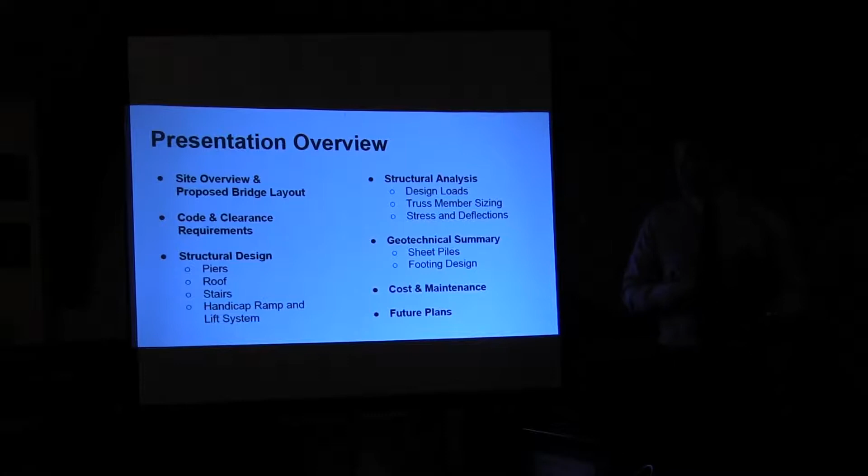All right, so just to cover some of the major topics we'll talk about today: we'll start with a general site overview of the proposed bridge layout, down the street where Diana Street, Friendship Street, and Broadway meet. Then we'll discuss some of the design constraints we face with code and clearance requirements. In terms of engineering design, we'll talk about the bridge piers, the various roof designs, and handicap accessibility systems we went through. We'll move on to structural analysis in terms of design loads, stresses, and member sizing, then finish with a geotechnical summary, touch on costs and maintenance, and finish with future plans.

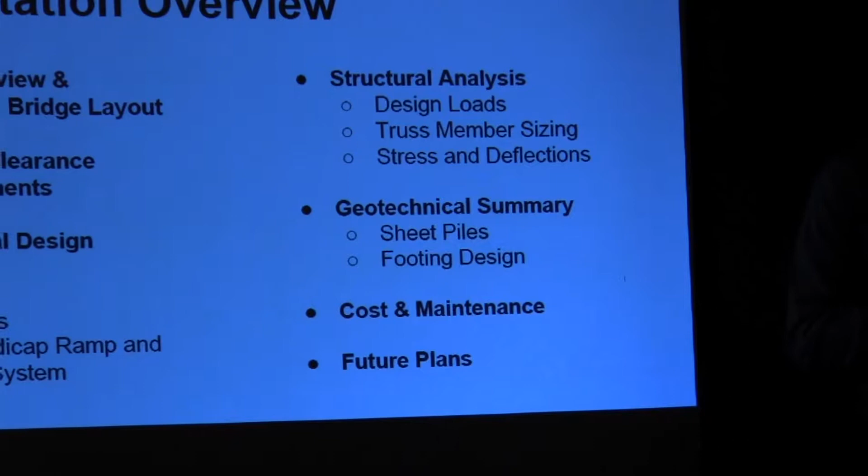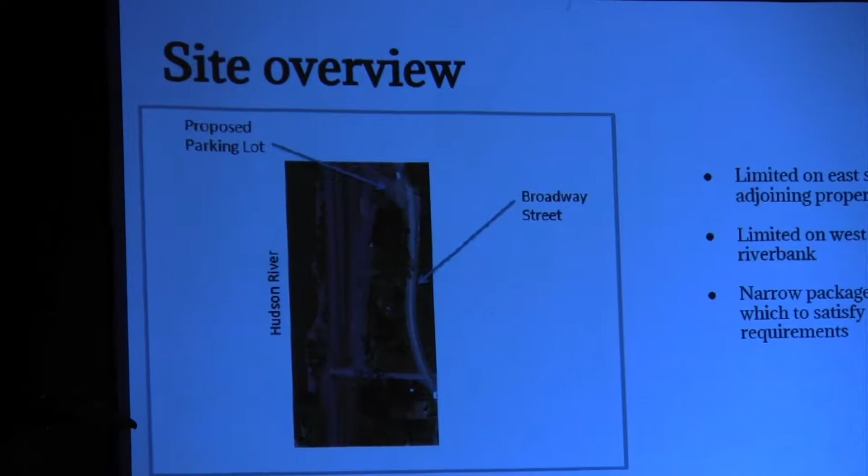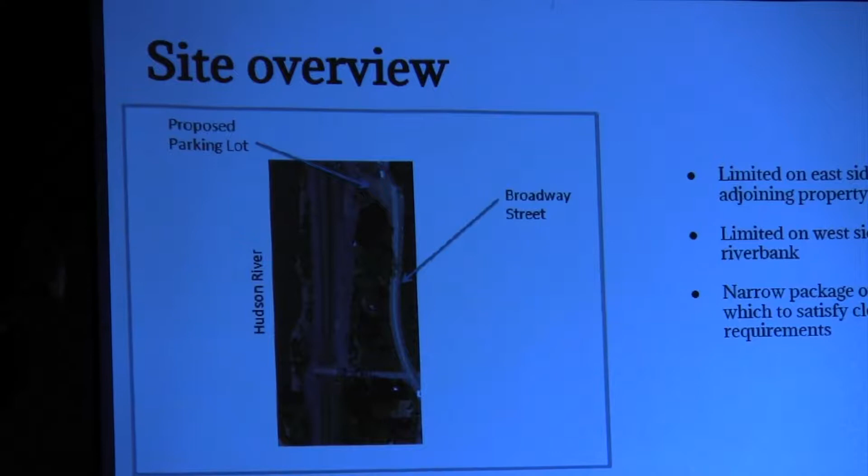For those of you that aren't familiar with the site, this is taken from Google Maps. We're thinking of positioning the bridge just south of Diana Street here. As you can see, the site is highly constrained by the Hudson River on the west side and the existing property lines on the east side. With Broadway Street running parallel, there's this empty lot, so we're thinking that could be a proposed parking lot further on in the project.

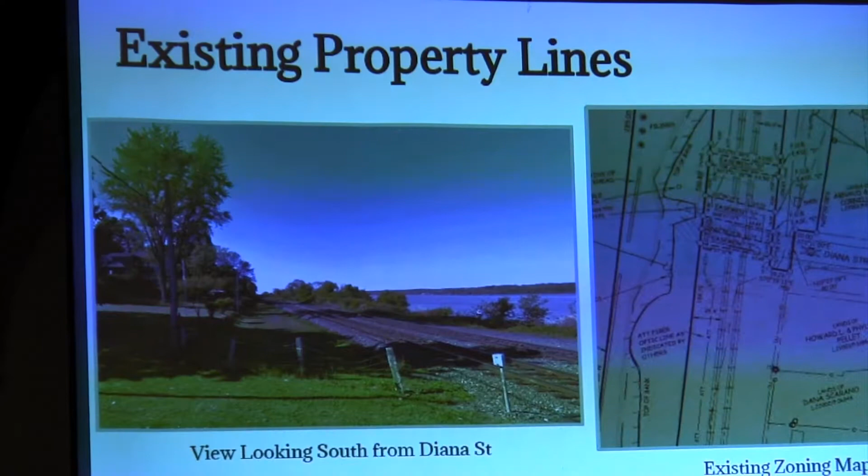This is just showing the existing property lines and how close we are to them with the railroad tracks. There is a law saying we could only be so far from the property lines, and that was taken into consideration in placing the bridge. On the right is an existing zoning map which shows who owns those properties and which ones the town owns.

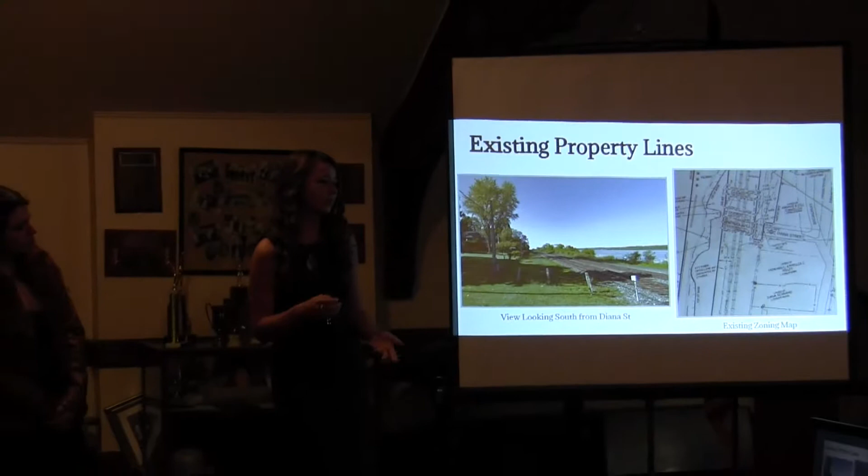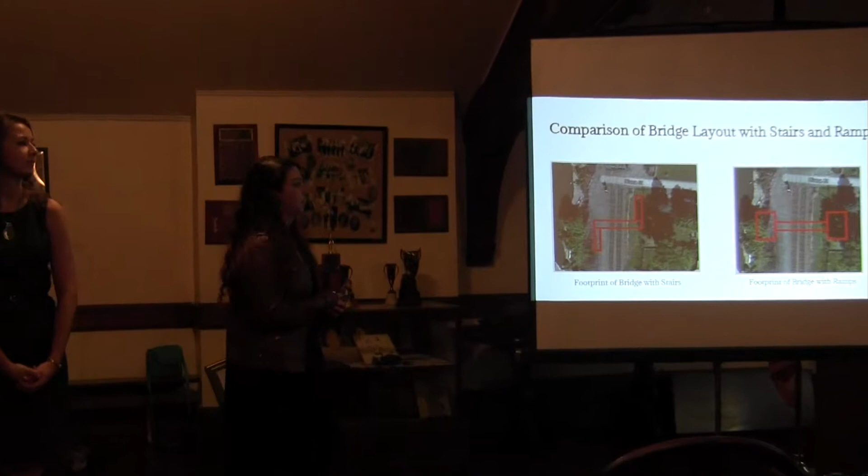In this particular slide, you can see our 2 original designs for the bridge. Our first thought was to create a handicap ramp to comply with ADA requirements. But as you can see on the right-hand side, that's the footprint of the bridge with ramps, and it's massive, clunky, and ugly. Each one of those ramps would wind up being about 300 feet long on either side.

So we decided instead, after talking with Joel, who gave us the wonderful idea of the handicap lift, to start exploring putting a handicap lift up along the flight of stairs on the other side, as you can see on the left hand, which is just the footprint of the bridge with a staircase instead.

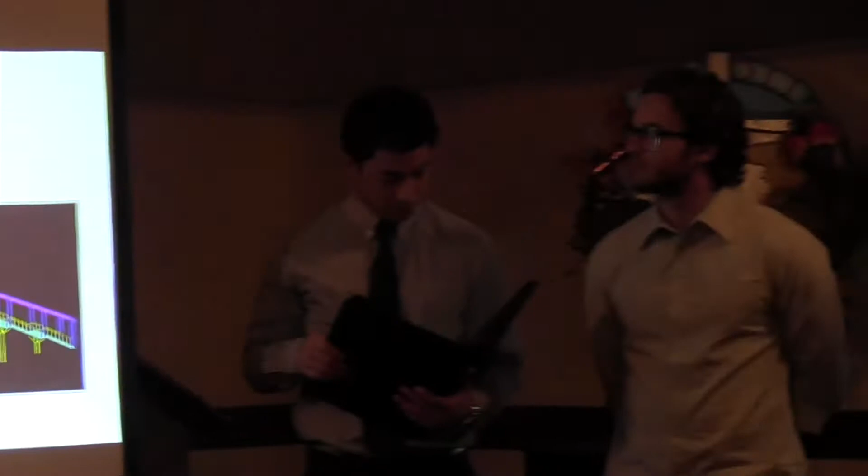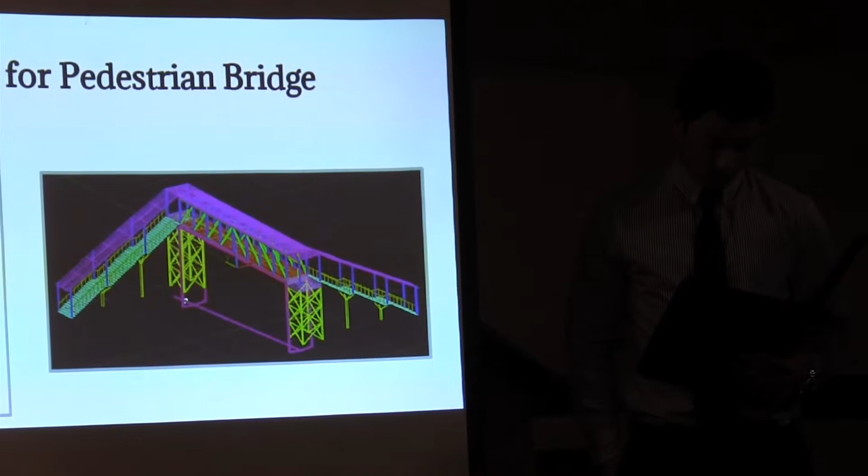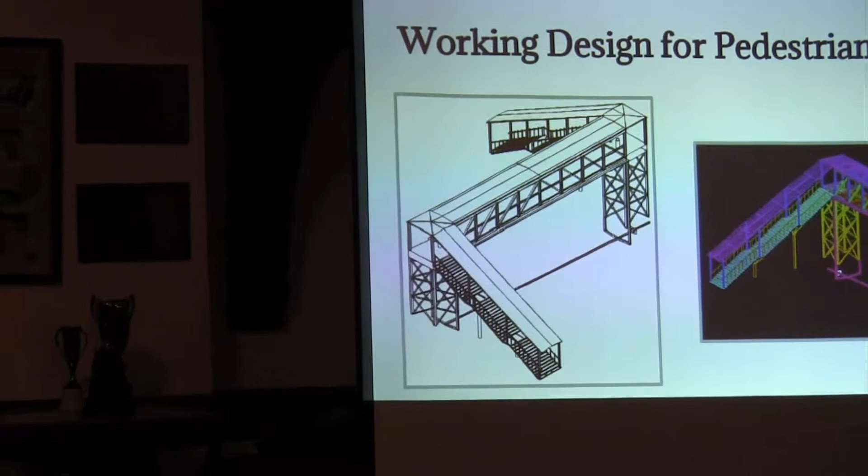So like I said before, I was the drafter, so we designed all our members from AutoCAD, took a bunch of the feedback from the last time we were in town, and this is the current working design. There's a fully covered bridge and fully covered staircase. The handicap lift that we'll get into later is attached to the inside of the staircase. The staircase is about 10.5 feet wide, each platform is about 10.5 feet wide as a square, and the bridge has a clear width on the inside of about 8 feet. The entire thing is 25 feet above the railway, and we'll get into that later.

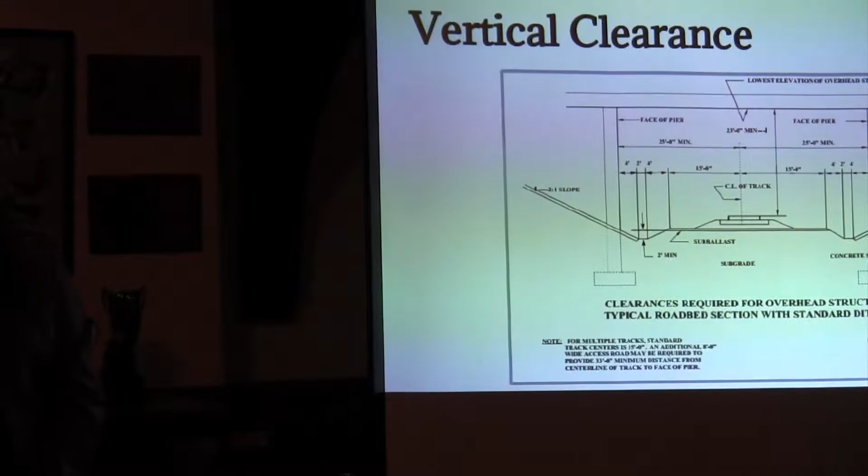One of the major requirements we had to contend with was the vertical clearance requirements. In order to have a bridge over a railway, the minimum clearance requirement is 23 feet, which increases for pedestrian bridges. So the max clearance, I think, for the bridge was 25 feet from the top of the tracks to the bottom of the bridge.

In addition, we had to deal with horizontal clearances, so the slope in the area might require some cut, meaning we'll have to remove soil from that particular area, and on the east bank, fill, meaning we'll take that cut soil and fill it in to smooth out the slope on the west side of the bank. More geological data is really needed for that, though. We don't have the resources for the soil surveys.

The bridge materials we're mainly using are steel and timber. Steel for its structural capacity, and timber because it's just way more aesthetically pleasing. We wanted to make sure that we were presenting to you guys a bridge that wasn't an eyesore on the community.

So then we looked at the individual components of that truss, which would be an arch and a Pratt truss. In the end, an arch would have been more difficult to construct to get that curvature right, and it would also have taken up more of the view shed. So our design is a Pratt truss, which is efficient to design, efficient to build, and stays with the aesthetic of the old railroad bridges.

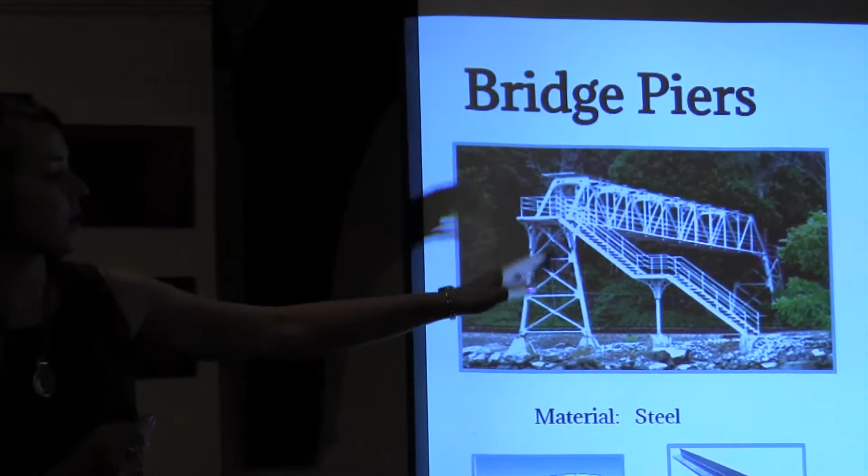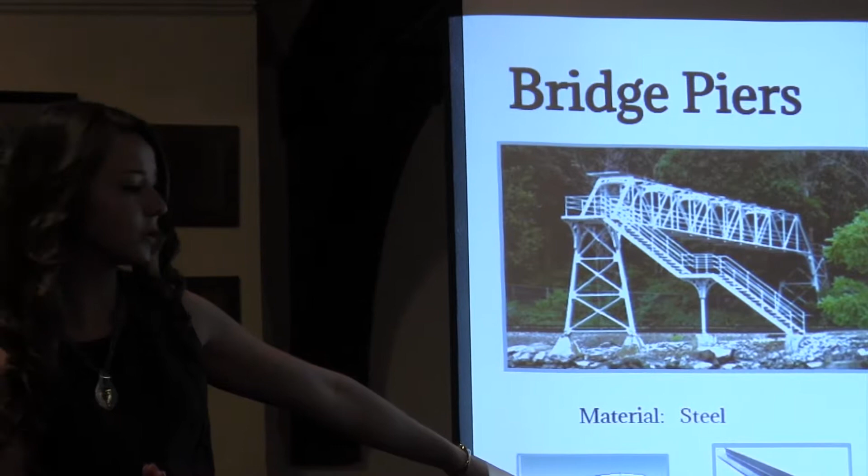The bridge piers, after consulting with the village of Tivoli at our last meeting, we had gone with a steel tower design. This is an example in this picture. The photos on the right are structural analysis of it, but it's a 3D steel tower with cross bracing. It's comprised of two sections, an HSS member, which is this hollow steel tube, and then angles for the cross bracing, and this is all made out of steel. The piers were analyzed in a computer analysis program and checked for all the loading, and then the member sizes were optimized accordingly.

For the alternatives, we had looked at concrete piers and also timber piers. We liked timber because it would go with the aesthetic of the bridge. However, in order to get the capacity we would need, the timber piers would be massive. So having steel piers allowed us to have a smaller footprint and a smaller column thickness. Concrete is very good for taking compression, so we could take a lot of load with that, however they're not as aesthetically pleasing. So one of our earlier designs was with a concrete column, but when we consulted with the village, we realized that the steel tower piers were more pleasing to everyone.

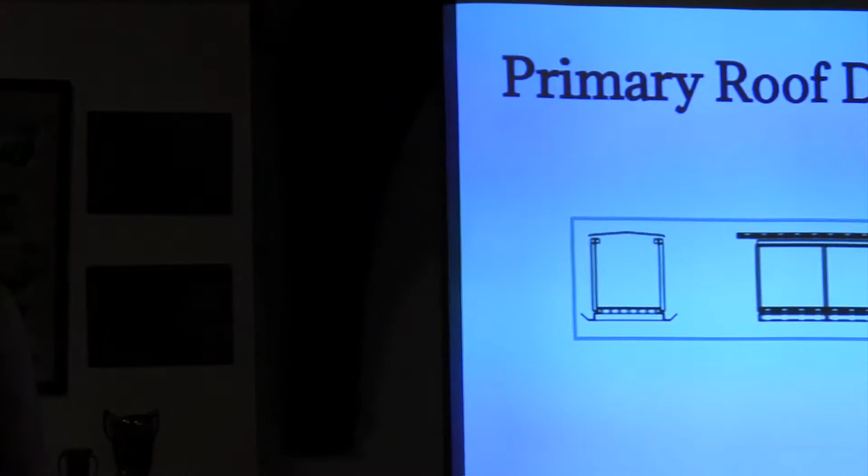So for the time being, this is the primary roof design. There are a few alternatives that will follow, but this is the cleanest design we found. It's all orthogonal with the bridge, it's neat, and it takes up less of the view shed. There are a few code requirements that say we have to drain water away from the train track by law, and certain code requirements that say how much an angle has to occur on the roof or the deck, and how much water needs to be flowing away from the railway specifically.

As you can see on this slide, there's a lot of play with it. I drew up a few options in AutoCAD to show the free play available, should the town go further with the project, as long as the engineers on record follow the requirements, because we can't be the engineers of record since we aren't licensed.

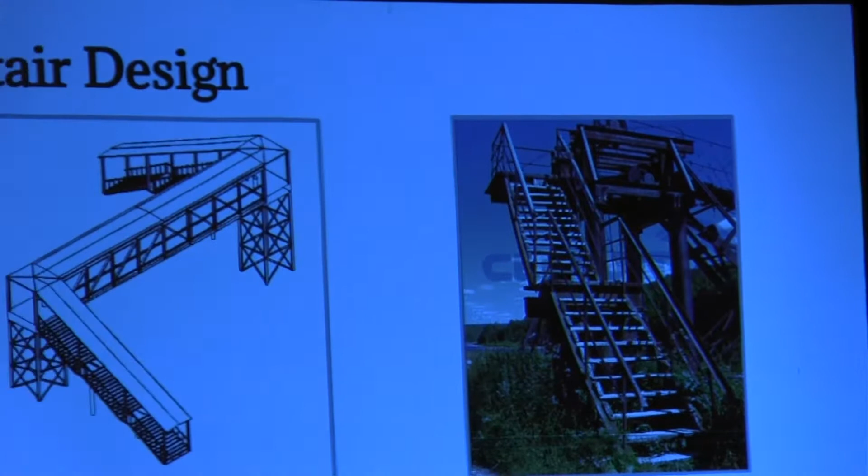Then there's the stair design, which also has certain code requirements. You have to have landings of a certain size every so often. Last time we were here, we decided to go for a covered stairway to help keep water, snow, and ice off the stairs. We also made the staircase wide so we could put the handicap lift and ramp on the inside, which we'll get into soon.

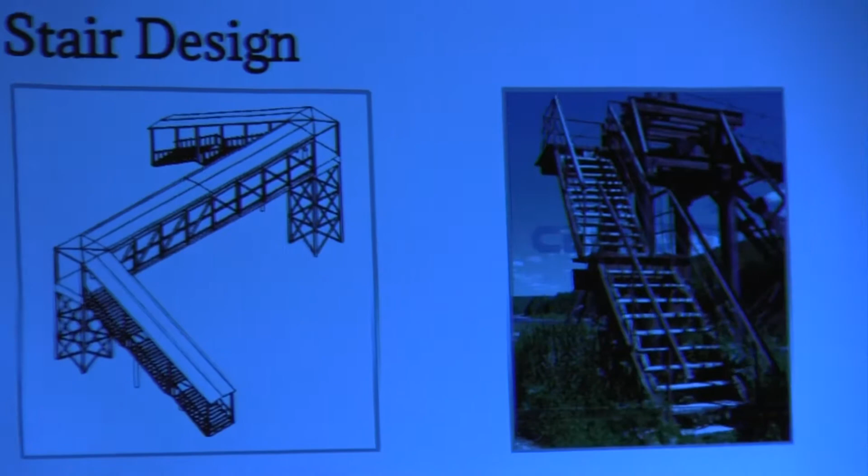More on the stair design, I went through the exact measurements earlier on. This just gives a little more scale and perspective of how big this bridge will be. We'll have some renderings later.

Now there's the stairway columns. In order to support the stairs, we felt that classically, cast iron was preferred. If anyone's been to the Harlem 125th Street train station, you have those really nice cast iron columns that support the roof. I figured something like that could be done.

It's a little bit outside of the scope of what we've done in school, outside our design experience. But once the loads are given to a structural engineer, those loads will be transferred to a manufacturer for cast iron columns, and the manufacturer will come up with the exact size of the members needed.

For the ramp, this was our initial design before we switched to the stairway design. As you can see, the footprints for either ramp were massive, ugly, and unappealing. So after speaking with Joel, we decided to move on to the stairway, which was way lighter and way more visually appealing.

We had initially heard from Joel that someone mentioned the incline lift at the Roosevelt Library. So we started pursuing that as an option. Doing some initial background research, we found this is also a pedestrian bridge over a railroad track, in Montana, so we used that as our inspiration.

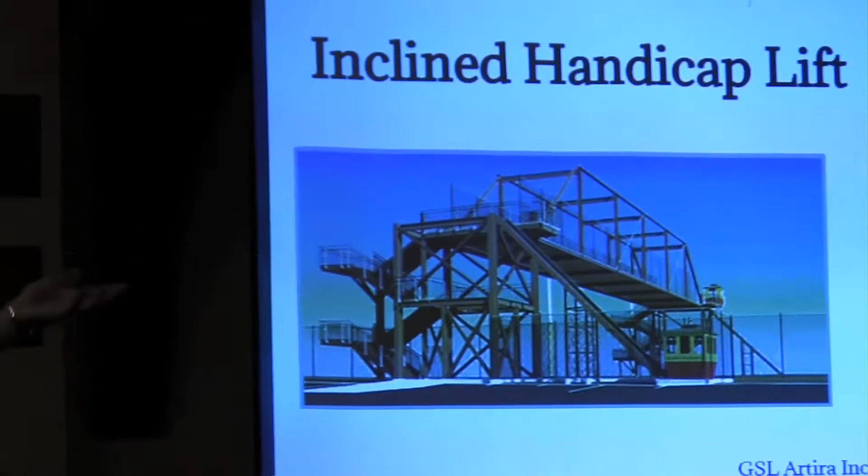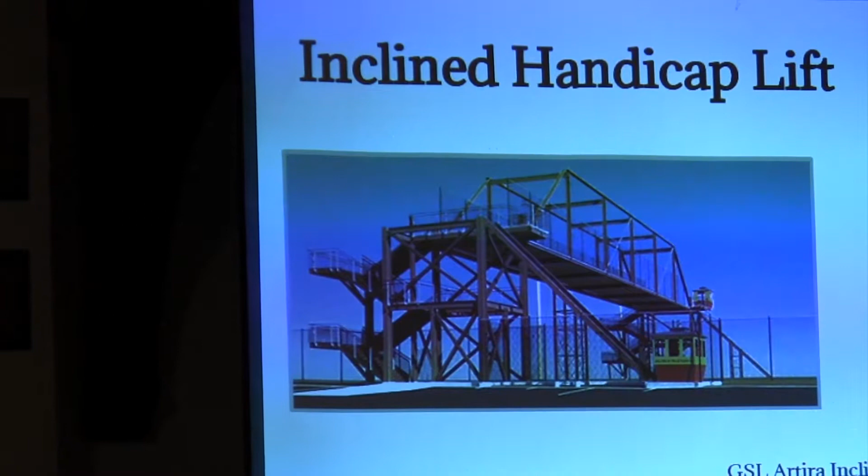They have more of a gondola style, but further research found this GSL Artira incline platform lift, which is primarily used in outdoor sporting arenas. This platform lift is ADA compliant and rides up the actual staircase on a set of guide rails integrated with the railing, allowing handicapped people to ascend the staircase. These are just some specifications of it.

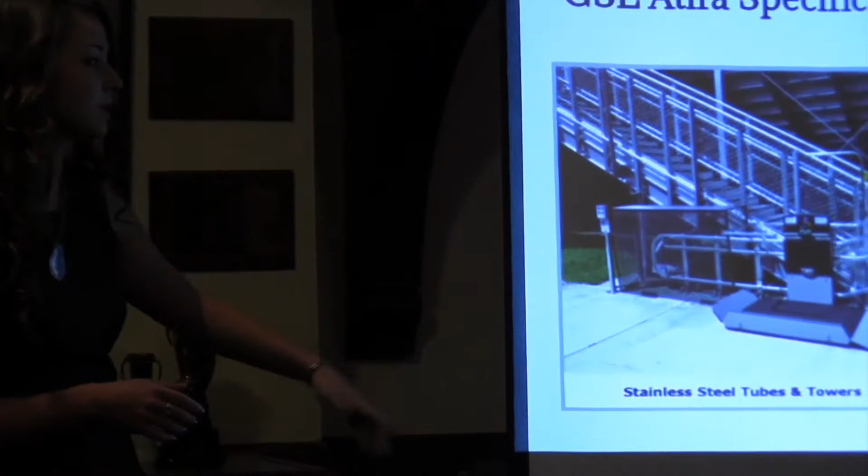This is off to the side when it's not in use, and you can kind of see this steel tube that it rides on. The largest platform size is ADA compliant.

It is available for outdoor applications, which is what we'd need. It has a maximum travel speed of 20 feet per minute, slowing down right before it begins and ends, and when it encounters a turn. It also has built-in safety features: it can sense if someone's on the staircase and stop, there are flashing lights to alert people, and the sides flip up so wheelchairs can't roll out.

To power this thing, we would need a 2 horsepower electric motor, and that's some information on the power requirements. None of us are electrical engineers, but I've been assured it would be very easy to power this, and if we don't want to connect it to the grid, we could possibly look into solar panels to power the lift.

Basically, you would take two rail systems running parallel to each other on the outside of the bridge, and at a certain point they would separate. You'd take some kind of spring-loaded hook mechanism strapped to the inside of the kayak seat in a horizontal position, and as it went up through a hand crank or motorized transportation, it would be drawn to the vertical position based on the separation in the railings. Then they'd come back together later on the bridge, and you could return it to horizontal and take it off the same way you loaded it on.

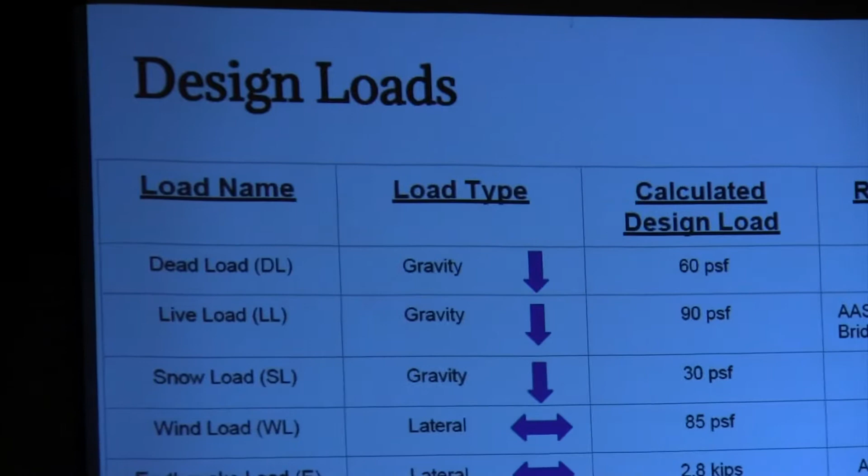Here we tabulated some of the major gravity and lateral loads, referencing national design guides such as ASCE7 and the AASHTO Pedestrian Bridge Design Guide. Most of these are self-explanatory, but to explain a couple: the dead load represents the self-weight of the structure, the bridge itself and all its structural components. The live load represents pedestrians or users of the bridge. So these just summarize some of the loads we used.

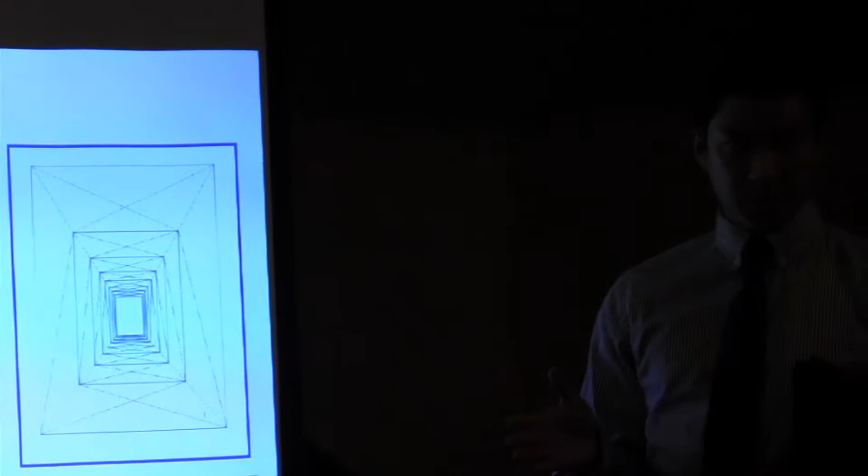With the loads determined, we decided on a truss structural system for its efficiency to carry loads and limit deflections. On the left you can see the set of gravity load trusses, which we designed to withstand dead loads, live loads, and snow loads. We combined that with a lateral load truss system down at the roof level and below the deck, which primarily resists wind loads and earthquake loads.

So here's an image from our structural analysis program. This is what you'd see when you put those two systems together.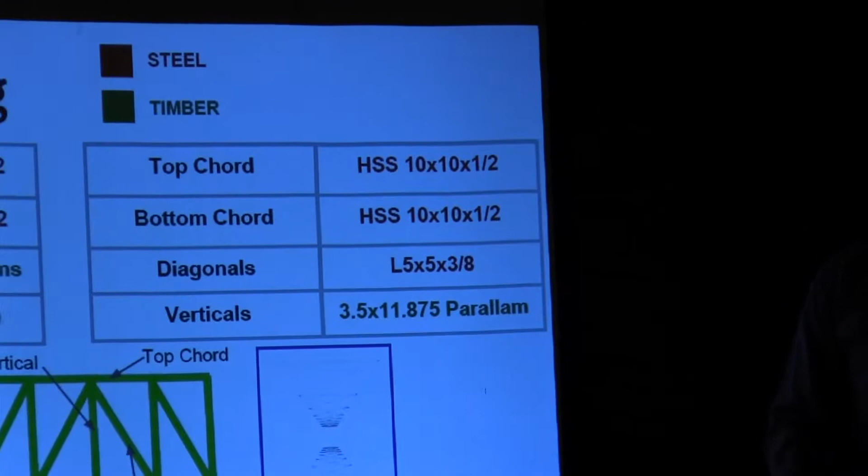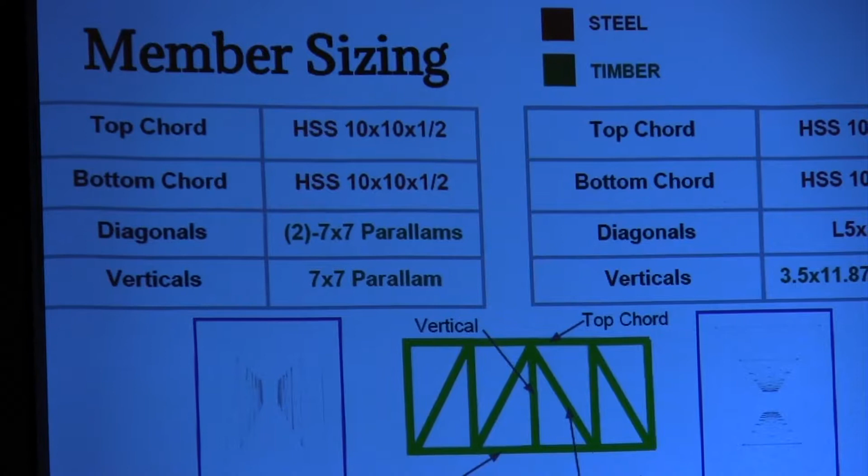So just to give you a gauge or perspective of how big these pieces would be, the biggest pieces are the truss chords. The top and bottom chords of each of these trusses are, as Casey mentioned earlier, an HSS, which is a hollow structural shape — basically just a tube of steel, 10 inches wide, 10 inches tall, and a half-inch thick. So those are the member sizes.

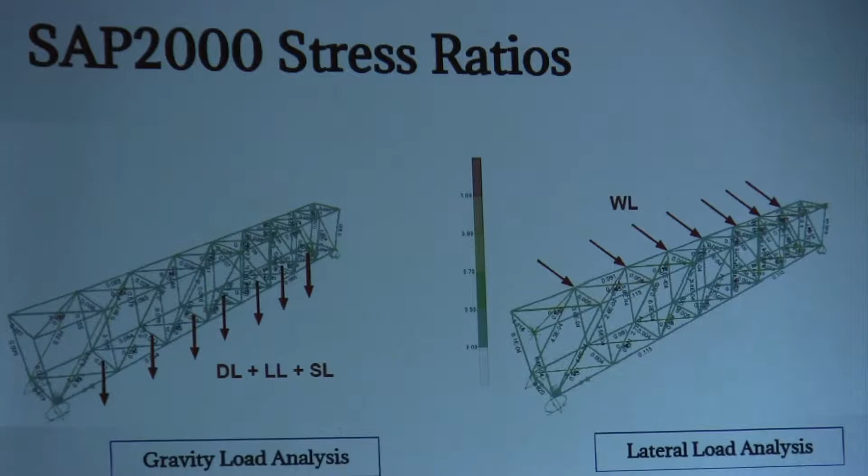Moving on, our structural analysis program is called SAP2000. Here are a couple shots of the whole structure as we loaded it with gravity loads and wind loads. It's hard to see a little, but the colors represent the amount of stress in those members. As you can see, most of it is blue, representing lower stress, somewhere between 0 and 50%. We tried to avoid any red members, which would represent an overstress, and we were able to do so effectively.

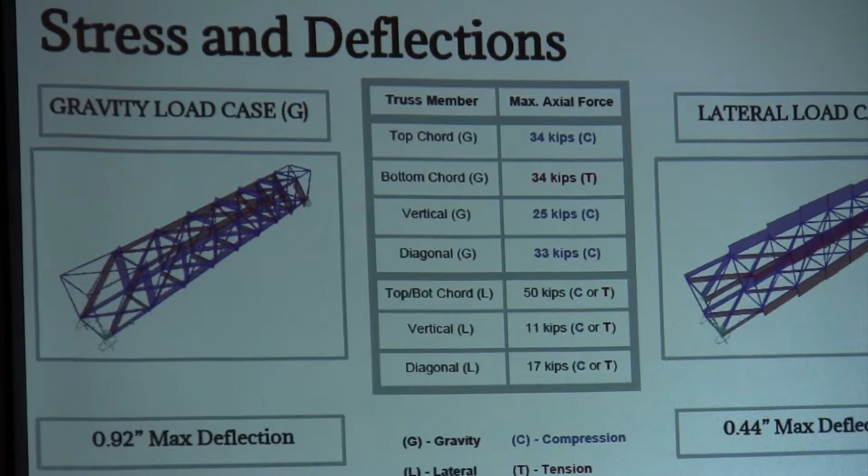By code, we were limited to a deflection limit of L over 360, with L standing for the length of the bridge, which we designed as an 80-foot bridge. If you take 80 feet, multiply by 12, and divide by 360, you get 2.67 inches, which was the maximum deflection allowed. After running it through the program and sizing the members, we were able to keep the deflection in both directions, gravity and lateral, below an inch — well below our allowable 2.67 inches.

I also tabulated the maximum stresses we found in each of the members. Just to give you a gauge, those top and bottom chords we talked about before have to withstand a max compression or tension of 50 kips, or basically 50,000 pounds of force.

Another one of our major concerns was detailing. We didn't design for detailing specifically, but we thought of a lot of different options. For example, driftwood railings would be an option — we believe that would be more aesthetically pleasing on the bridge, along with a copper-plated caging, since as stated previously the entire bridge has to be enclosed so pedestrians can't throw debris onto the railway tracks below, and so no one falls or jumps onto the tracks. It all needs to be covered.

So we were thinking about copper plating for the mesh that would go over the bridge, because you'd get that nice oxidation over time. Another thing was we need to put bollards — those giant yellow concrete posts that keep vehicles from going somewhere — on the tops of bridges, because as I was told by someone who works in my engineering office, where there's a will, there's a way. If someone has a golf cart and thinks it's a great idea to try driving over the pedestrian bridge, chances are someone at some point will try to do it. So we were thinking about driftwood or wooden bollards to put at the top, just to make the whole thing more aesthetically pleasing.

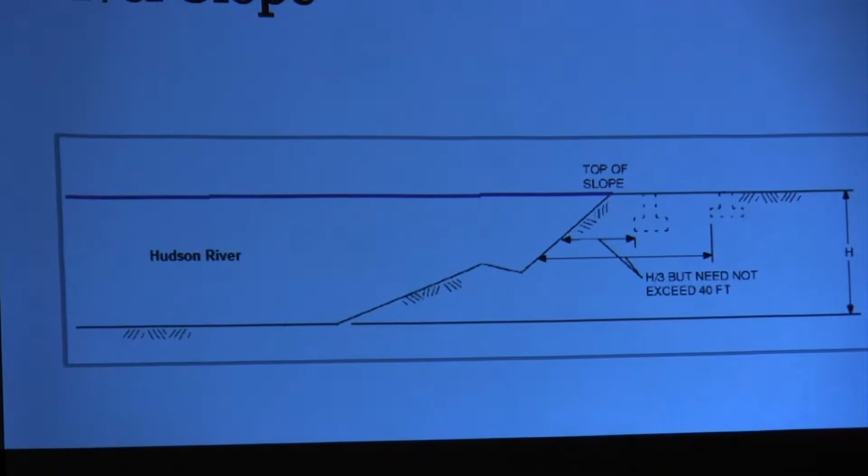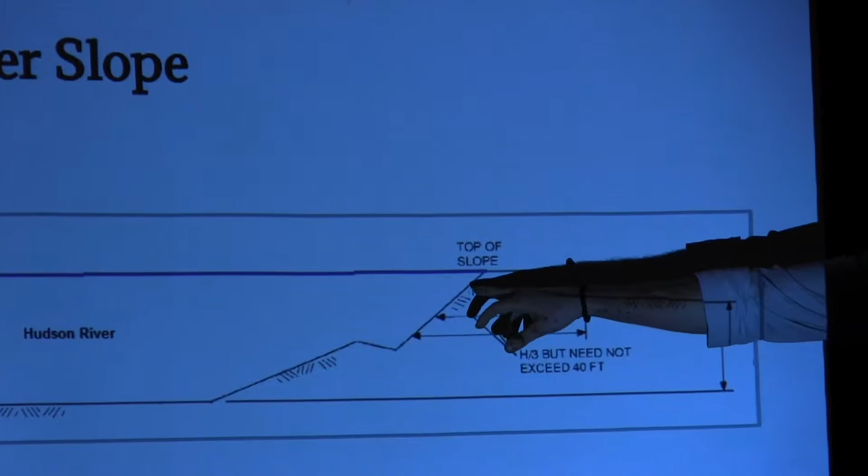The River Hudson was kind of complicated to build this foundation for this bridge. According to the degree that you'll face on the soil, that will make it difficult for building a foundation itself. They would require more study of how deep it will go and how fast, so that you could easily discover the degree for it and have a better calculation for its capacity.

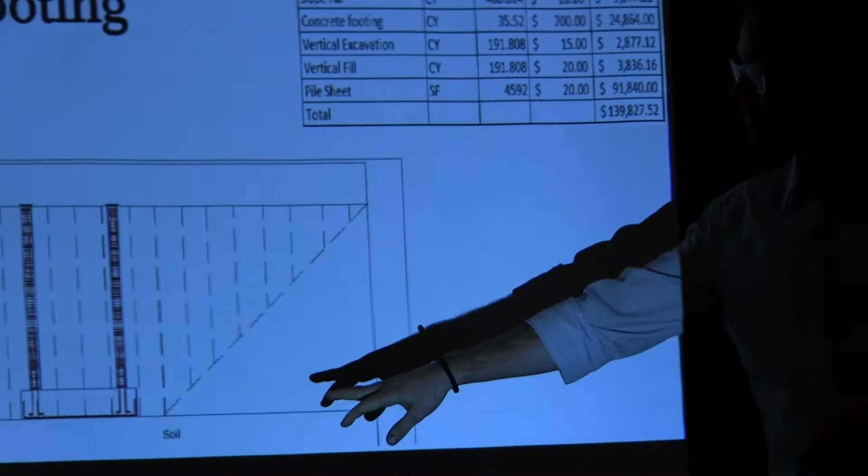So we ended up choosing a spread footing, basically because the soil underneath 17 feet is very weak for a pile foundation. To begin with the excavation, you can see here in the back, this is the sheet wall that we would have to build. It would have to go 28 feet below, and we'll start building the foundation at 12 feet below. This is a cost analysis of removing the soil and recompacting it in place.

Also with the pile sheet included. Pile sheet is very expensive in this case. You can easily see it's overcoming everything for that, but it's essential for doing this type of excavation. The location of the footing will be located at 60 feet north from Diana Street. You can see here Diana Street would be around here.

For the bridge piers, the way structural steel works is it's typically bid on by contractors as a lump sum pricing. This number came from going to a steel manufacturer's website and putting in the sections we would need to get a price. That does not include labor, putting it together, connections, anything like that — it's just a rough estimate of the material cost. We would likely be able to get this made by a steel manufacturer and have it come pre-assembled to the site.

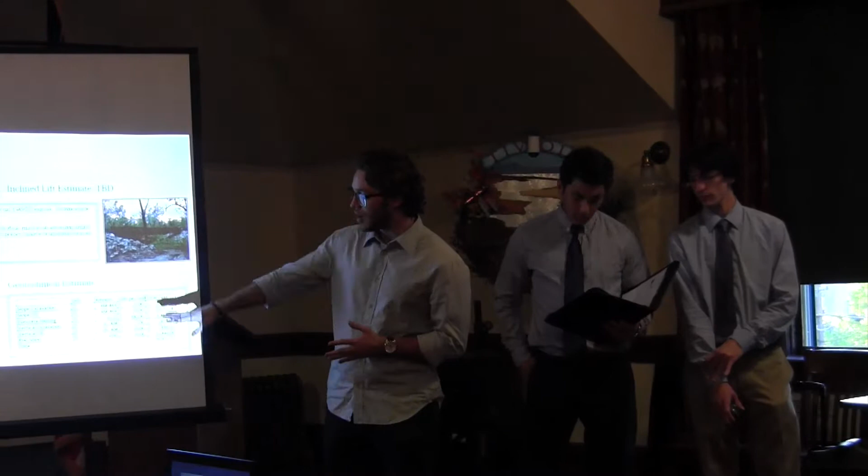Like I mentioned before, the soil-related estimation is basically removing the soil and refilling it, compacting it so that it could withstand the capacity of the bridge. You will also locate here the concrete footing estimation, and like I said before, the most costly thing is the pile sheet, which would have to go to a length of 50 to 60 feet, because you would have to excavate and do a ramp to put the footing for the bridge and the footing for the stairway.

So we just want to talk a little bit about maintenance as well. I guess you could relate maintaining a bridge to maintaining your car. You want to set up a schedule, like for your car every 3, 4, 5,000 miles you get an oil change. You could say something similar for a bridge, just maintaining the various structural components and the deck and whatnot.

So we put together a table here with some of the major categories. There's going to be a lot more — like I said, we're compiling a table for the final report. But just to talk about a few: repainting the steel and timber. The reason those came out higher is because those are your main structural components. You want to keep those in good shape, keep those strong, keep your bridge strong.

The snow and ice removal costs could add up from year to year. But a way to maybe avoid that would be to have the option to close the bridge during the winter months if you don't use it very much, and that way you could keep it safer and avoid accidents like slipping on the ice.

And for the deck repair and replacement, if we were to design the bridge with a concrete deck, that number would have shot up probably higher than even these two at the top here. But we chose a wood deck system to keep those costs lower.

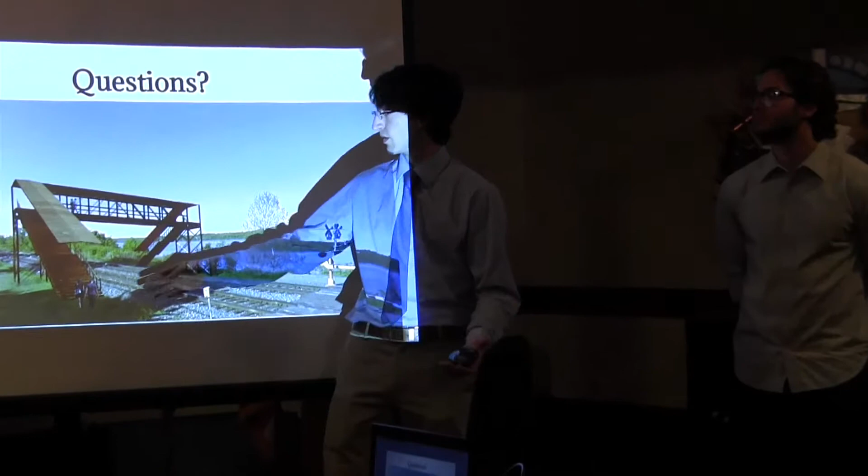And this is 60 feet south of Diana, because someone was saying 60 feet north. Yeah, this one's south. If it was said that it was north, we most certainly mean south. All the bridge plans have been done for south of Diana.

Just out of curiosity, at the beginning you very quickly made a point about deciding where to actually place the bridge, the north end of the parcel versus the south end, and you chose the south, so the entire presentation has been around that. I'm curious what led you to choose the south versus the north or the middle or any other spot, and if you can elaborate on the pros and cons either way. I guess I just want a little more information about that decision.

Can you go back to the site overview? Let's start with the plans. In class, I think it all started with the plans when we were looking at the allowable space for the property lines. It's very spatially constrained, especially when you think about the areas owned by the railroad. I highly doubt you guys want to go through trying to buy property from the railroad. We were talking to Joel about that earlier. Yeah, we already did. It was a pain in the butt. So that was the initial part of it, not wanting to encroach on anyone's land or the railway's land.

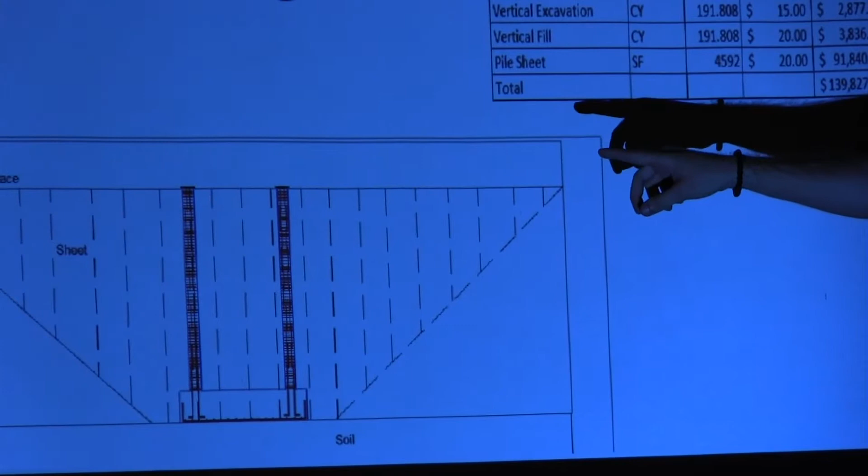So imagine that footing over there, that square footing, going all the way up to the surface. Pile foundation is simply putting concrete piles all the way down, and those are the ones that sustain the heavy loading. Those can either be driven in or vibrated in. You don't have to excavate anything, it just drives in. Normally it's more expensive than spread footing.

But because of the sheet piles, they're huge sheet piles, 28 feet. We needed to perform these sheet piles because the railroad crosses here and we can't stop the railroad, it has to continue.

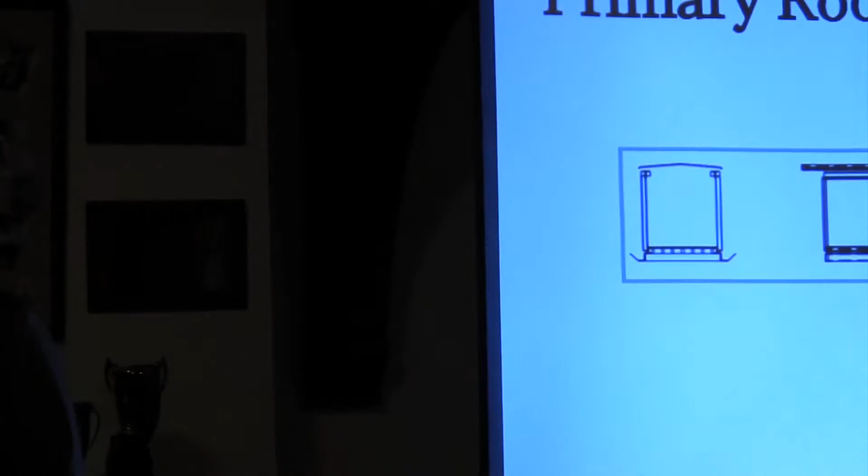The roof design over the tracks, is that going to dump snow on the tracks in the wintertime, or where's it going to go? So in this roof design, it's a little small in this drawing, but on the left-hand side there are two troughs that act as gutters to catch rain and snowfall that falls from the roof that would otherwise fall onto the tracks.

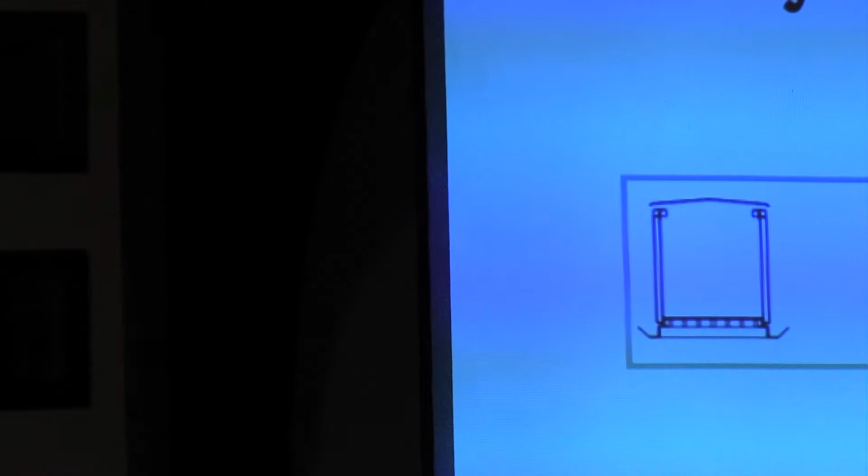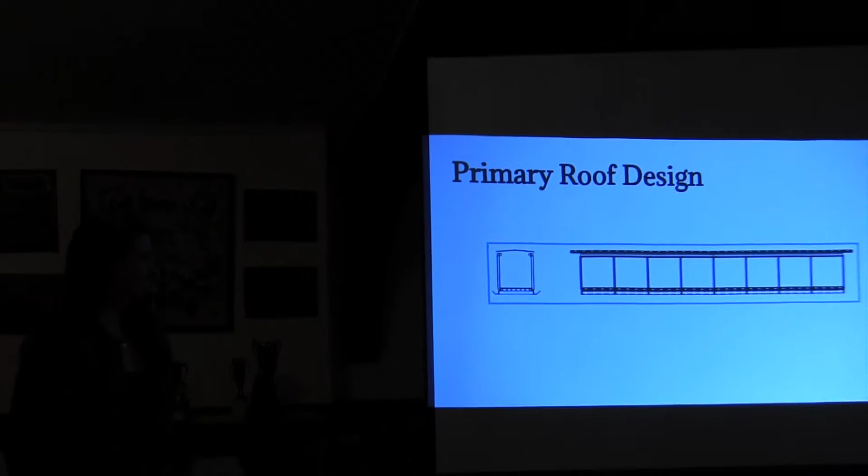The exact size of those would most likely involve a further study, involving local experience with how much snowfall is typical. But besides that, the entire point of the design is to minimize the impact of rain and snow that would otherwise fall into the tracks. Nothing is directly draining onto the tracks.

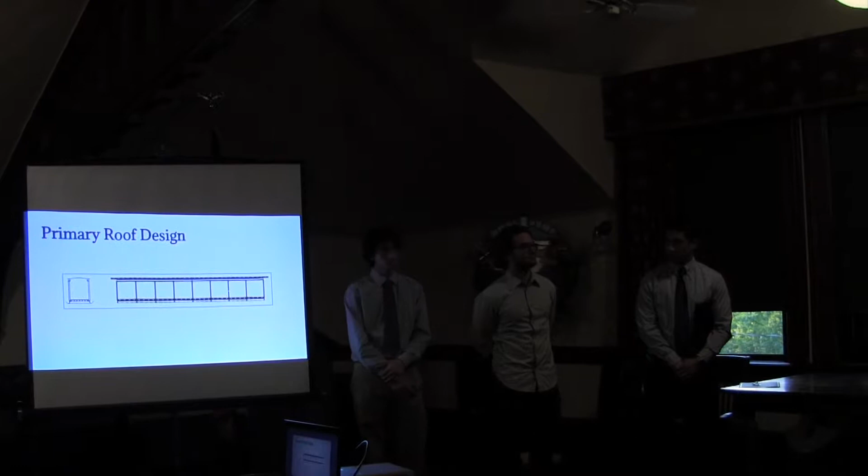Is there one particular roof design that would support solar panels placed on the roof over another design? That becomes a matter of local codes. I know for a fact that in the Albany region, depending on how the solar panels are mounted on the roof, they have to be at certain angles, and those angles can't change, they're a fixed angle. I want to say it's somewhere in the 20-degree region.

So if you had maybe something that wasn't necessarily peaked in the middle of the bridge, but same general longitudinal design, but maybe a little taller peak longitudinally, then it might be able to support the angle, and you would be able to mount the solar panels directly onto the roof.

I was thinking to worry about if you have drainage troughs on the top, you won't really be able to have— that's what these are. In the original drawing, you had the drainage trough on the bottom. Up here, these little lips serve as the drainage trough for the snow and ice and water. So I think that might get in the way of these solar panels as well. That could potentially impact that.

I understand that the railroad has a 30-foot easement on both sides of the track. How do you avoid, or how do you get permission to build your stairway or ramp on that 30-foot easement?